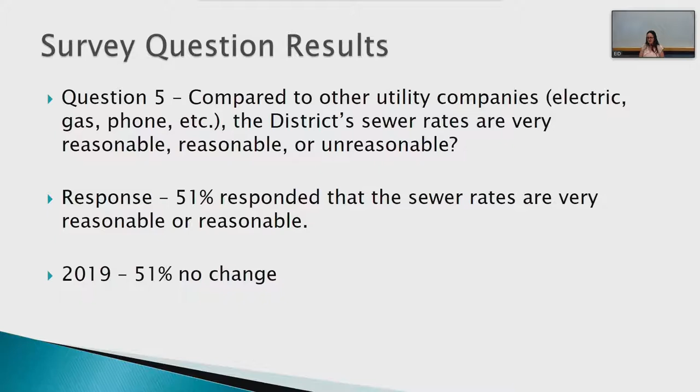Question for you. Yes, Lori.

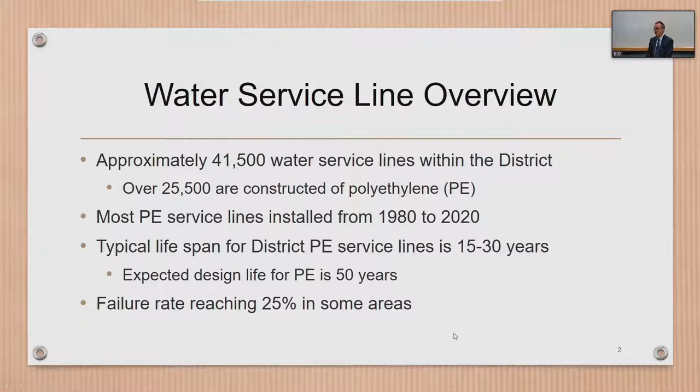And we're observing in some areas of the distribution system, service line failure up to 25%. Next slide, please.

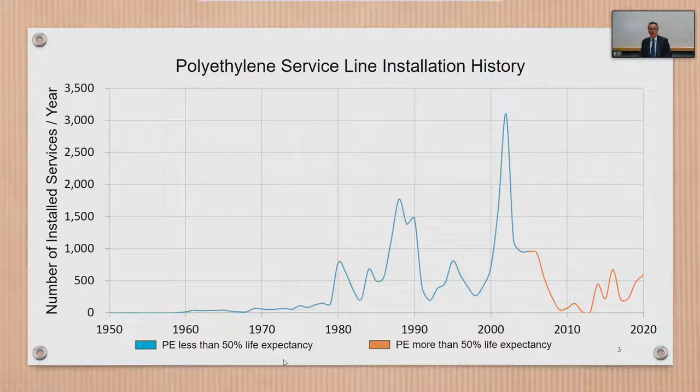This graph shows historical data regarding polyethylene line installation. You can see a couple of peaks during housing booms: early 80s, late 80s, late 90s, early 2000s. We have two different colors on this chart. The brownish line shows service lines that have more than 50% of their life expectancy used. The blue line represents service lines that are below 50% of life expectancy.

Next slide, please. In 2020, we recorded 651 leaks in our system. 505 were on service lines. That's almost 78% of total leaks.

As we know, and as presented by the GM, performance indicators show that EID has 42.41 leaks per 100 miles. That's almost worse than any agency that participated in the AWWA benchmarking. Increased service line failure pretty much requires us to move resources from regular preventive maintenance to service line repair and replacement.

That pretty much affects our maintenance program, hydrant maintenance that is essential, especially in our county with dry weather. They need to be ready all the time for use. Also, we have thousands and thousands of valves in the ground that need to be touched and exercised, and all of that is somewhat deferred because we're allocating staff for service lines elsewhere.

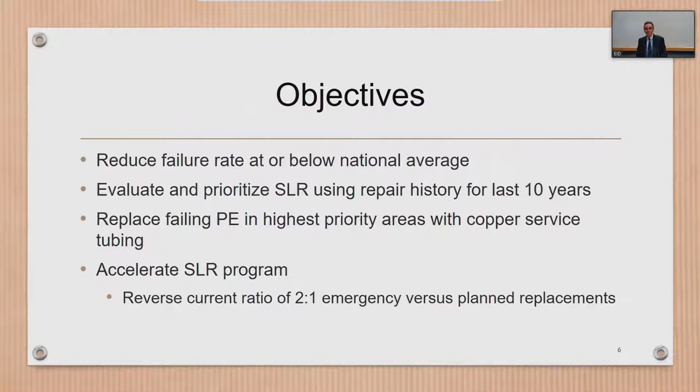Another objective: in analysis, we considered 3 different approaches to attack the same issue and improve the service lines replacement program. First approach was to maintain the current 3-person crew. Second approach is contract planned replacement with a third party. Third approach is additional staff to create a 5-person crew within El Dorado Irrigation District.

At the time, all three approaches were analyzed over a 10-year span. 10 years was chosen because the contracting approach is supposed to end in 10 years. Also, what we actually analyzed here were the basic three project management parameters: time, money, and quality. We assumed that all three approaches would keep the same quality, and we had to compromise on time and money.

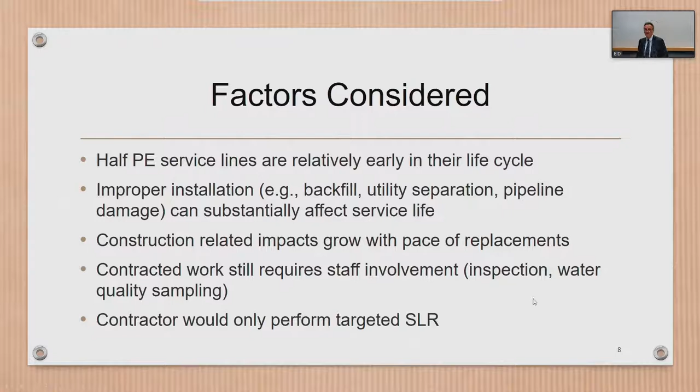Another factor that needs to be considered in this evaluation, even if we go for contracted third-party, EID crews will continue to perform emergency service lines repair and replacement. The contractor will pretty much do just targeted pre-planned service lines replacement.

Next slide, please. First approach, as I mentioned, is to maintain current crew.

Service lines replacement program was successfully implemented in 2020. Initially we had some challenges to bring 3 additional staff on board. That took a couple of months, and after that we were hit with COVID. But despite that, I think it was a successful year. We were able to replace 505 service lines: 350 was emergency response and replacement, and 155 was pre-planned.

During 2020, it was noticed and visible that a 3-man crew is not sufficient, because they're supposed to do multiple activities, and interruption of workflow was frequent, even downtime hauling spoils from site, bringing sander or cutback, and that inefficiency affected the number of service lines replaced per day.

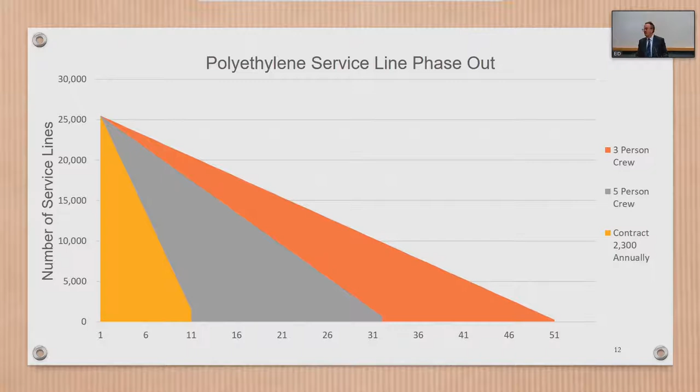This chart shows all 3 approaches. On the right side, the 3-person crew will phase out polyethylene lines in 51 years. The gray area is the 5-person crew, where polyethylene lines will be phased out in 31 and a half years. And yellow shows phasing out in 10 years with a pace of 2,300 contracted pre-planned services replaced. Next slide, please.

The recommended approach is to add 2 additional field staff, remain within the existing budget with inflationary adjustment, increase service line replacement from 500 to 800 lines per year, and complete phasing out polyethylene lines in 32 years, matching the full life expectancy of that type of line.

Overall cost of the project is compared on the same dollar value. Savings are around $5 million with this approach. This will increase efficiency in line replacement.

Danko, could you repeat that? Because I was wondering, did you look at present value, future value of money, and all that sort of stuff?

Base benchmark was a 10-year contract. And all 3 options are done on a dollar value as of the end day of the contracted option. That means we're comparing apples to apples.

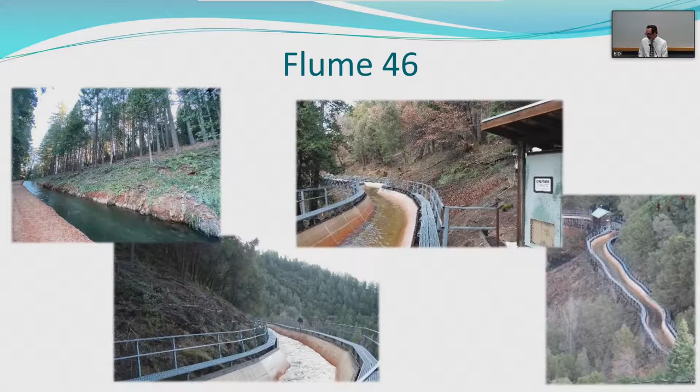Watch what you're doing here. Focus, it's way over here. Got it. Here we go.

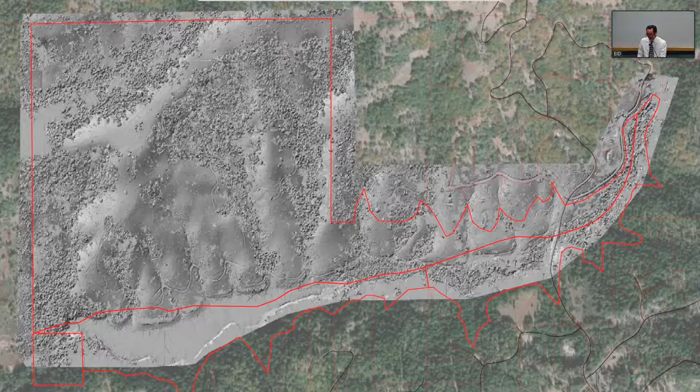This is the same drone imagery, just processed to really highlight the areas that were masticated to give it a smoother texture. You can see the ridge lines moving from south to north there. Those are the areas that were masticated along with the ridge line there. It's a stark difference, and if you have the ability to go out there and take a walk, you'll see a lot of work's been done out there. All right, next slide, please.

Mastication treatments started at the Weber Reservoir property in 2019, and there has been significant resprouting since then. The revised project will apply herbicide treatments to approximately 250 acres that were previously masticated, and the follow-up herbicide treatments were recommended and approved by CAL FIRE and is a standard way to control regrowth. The initial herbicide treatments are scheduled in the fall of this year to follow up spot treatments in early of next year. Next slide, please.

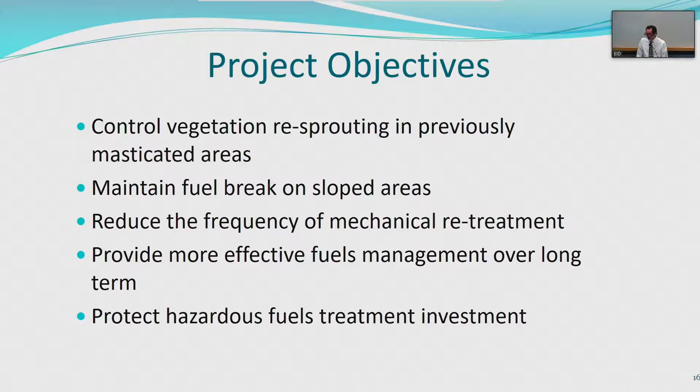The project objectives are to control vegetation resprouting in previously masticated areas, maintain a fuel break on those steep sloped areas, reduce the frequency of mechanical retreatment, and provide more fuels management over the long term and protect the district's investment. Next slide, please.

Now turning to the California Environmental Quality Act requirements. Staff revised the EID vegetation management project to include the use of herbicides at the Weber Reservoir property. An addendum to the ISMND was prepared and evaluated the use of herbicide treatments and determined that there were no new significant impacts and required no additional or change to the mitigation measures in the original MND. Next slide, please.

CEQA does not require an addendum to be circulated for public review, but in keeping with the board's guidance, staff provided notices to the adjacent property owners and the responsible agencies as we did with the initial ISMND. The addendum was open for public review and comment from June 24th to July 23rd, and we received no comments. Next slide, please.

To complete the CEQA process, the board shall consider the addendum to the ISMND prior to making a decision on the revised project. Staff will file a notice of determination upon approval of the revised project. Next slide, please.

Question: so would herbicide treatment be an ongoing annual thing? Is this a one-off, just to help clean it up one last time? Where are we at on that? This would be a one-time application with grant funds. The long-term management of the facility would probably fall back to our operations management and manager, and director.

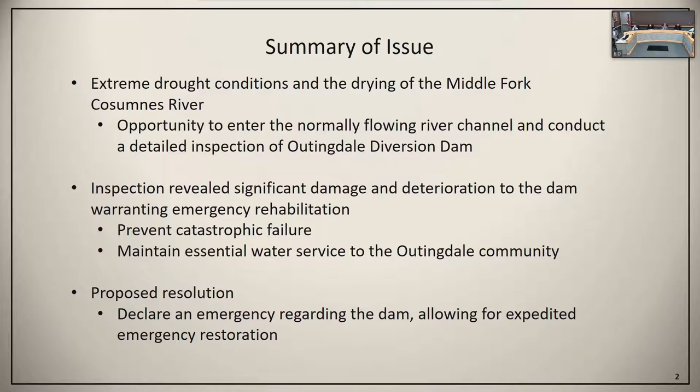Next, please. The main issues here are the extreme drought conditions and the drying of the Middle Fork Cosumnes River, which gave us the opportunity to enter the normally flowing river and conduct a detailed inspection. The inspection revealed significant damage and deterioration to the dam, warranting emergency rehabilitation, which, if put into effect, would prevent catastrophic failure and maintain the essential water supply to the Outingdale community. The proposed resolution would declare an emergency regarding the dam, allowing for expedited emergency restoration to be conducted during a time when water flows are lowest, providing the least effort to bypass inflows around the dam. Next, please.

To help us orient as we look at some close-up slides, we've assigned section numbers 1 through 7. Whether your point of reference is left looking upstream or downstream, in normal dam-related jargon we normally talk about it in reference to downstream. So if I say right, I'm talking about section 1, and left, I'm talking about section 7, okay? This dam, best we know, was constructed in the early 1920s, making it about 100 years old. We don't have any drawings on the dam. My understanding is this is something we agreed to acquire decades ago, so we don't have a lot of information as to what it's really made of, other than our firsthand observations. Next, please.

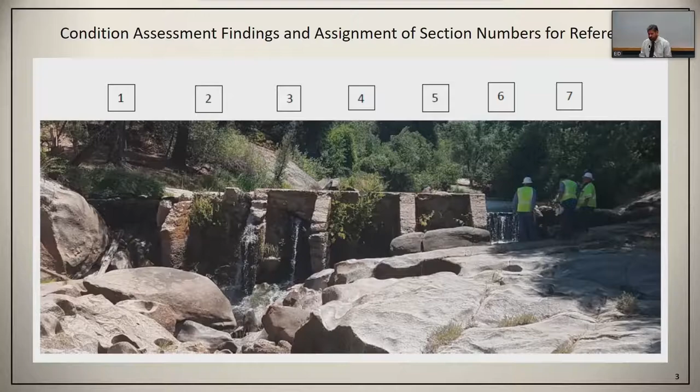This is section 1 near the right abutment. You can see hanging concrete next to the buttress wall - just to the left there, if you can point to that, Jennifer. Okay, thank you. That's what I'm talking about. That's just hanging by a piece of cable, and it's prone to fall. It's a hazard there. You can see the sandbags that were placed by crews in the last month to allow the ponding of water within the pumping area, but that's not a long-term solution either - that's something that would be addressed with the rehabilitation. You can also see some beginning undermining erosion of the base of the buttress wall here, and that's even more problematic on some of the other buttress walls. Next.

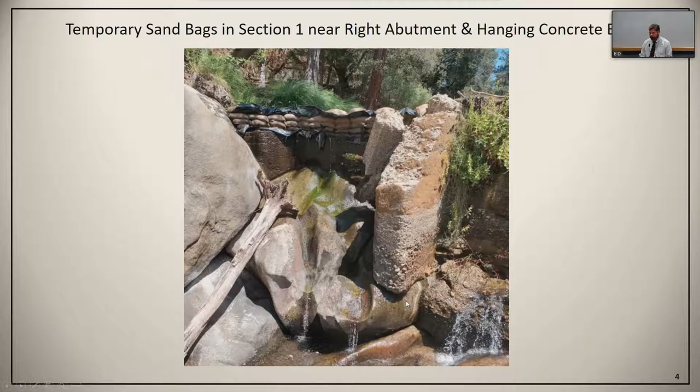This is the next section over, calling it section 2. Most of the dam crest is already broken off. You can see other pieces that are loose, ready to break off. You can see the opening where the arrow is pointing. Just below it, there's water actually passing all the way through from upstream to downstream - a through hole - and there are other places like that. You can see that crack joint to the right of it, also representing a through hole that may have been an old construction joint, basically through the pores of the concrete originally in that dam. Next, please.

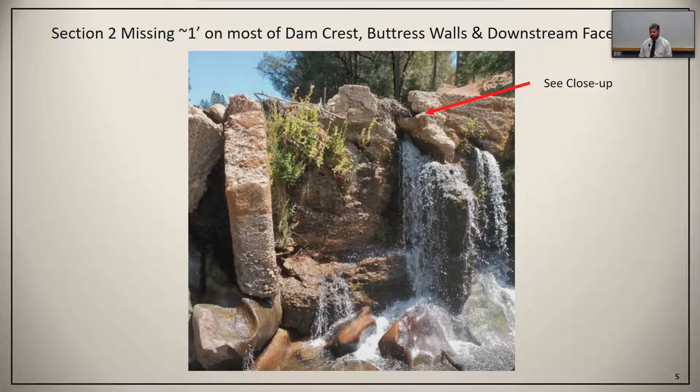This is a close-up. You can see the through hole a little bit better, and how this is fragmenting. You can also see where the red arrow is, the very minimal reinforcement - a steel pipe, 3/4 to 1 inch diameter, that seems to be the essence of the steel reinforcing we could see. There was also evidence of braided steel cable wound through this structure in places, but we don't really have any idea as to its spacing and consistency throughout the pour. Next, please.

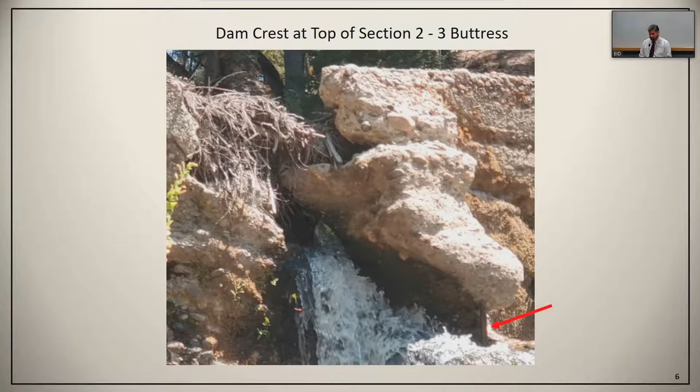This type of dam is often referred to as an Ambursen dam. It relies on the slab, or the main dam structure, being supported by buttress walls, and it was a variation to a gravity dam. If you're familiar with Folsom Dam or Chili Bar Dam, that's gravity—a very large mass of concrete, large footprint, and basically its weight holds it.

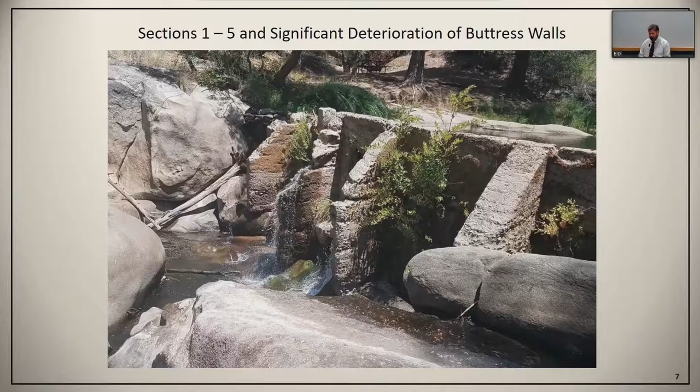You also have to deal with avoiding uplift pressures that can move the dam or cause it to become unstable. This doesn't have a drain system like that, but it's very reliant on those buttress walls—and that was the most troubling discovery in our inspection, looking at their condition.

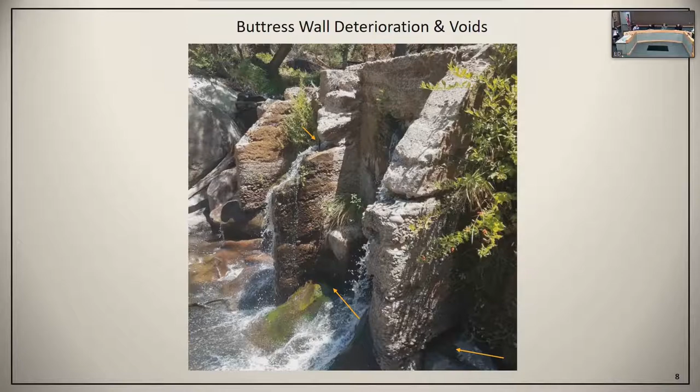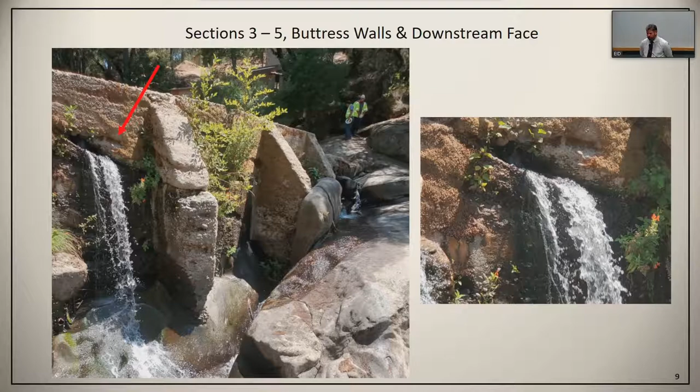Moving our way across, this is now looking at sections 3, 4, and 5 of the buttress walls. You can see still troubling deterioration going on until we get closer to the one being pinned by a rock near the spillway section. The two on that side are showing better conditions. The photo on the right is a close-up of that crack, which is basically a through hole, and of concern that it will continue to fragment and break up, or be more prone to do so over time.

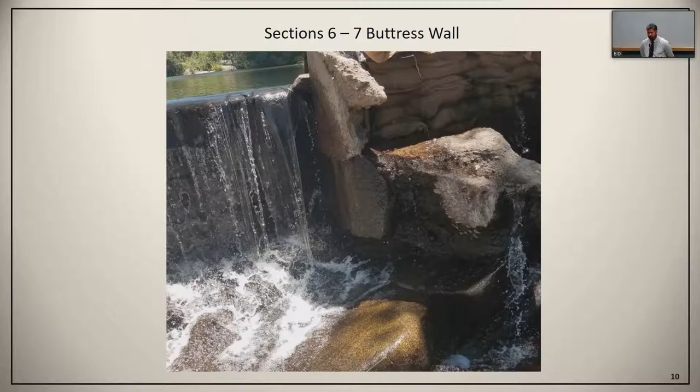We refer to the spillway or flashboard section as section 6, and the far left bank as section 7. You can see the buttress wall being damaged, and you can also see the sandbags, which we consider to be just temporary and will not be resilient to winter conditions.

Also a view of this left abutment. You can see a little bit of concrete on the far right edge on top of the rock—that's the remains of the old dam crest, and we believe it went all the way across to the dam crest on the far left, just beyond the flashboard structure. So the intent would be to restore that to its full height if we proceed with repairs.

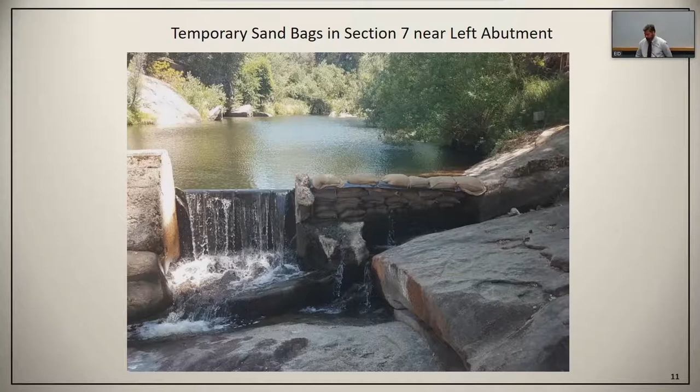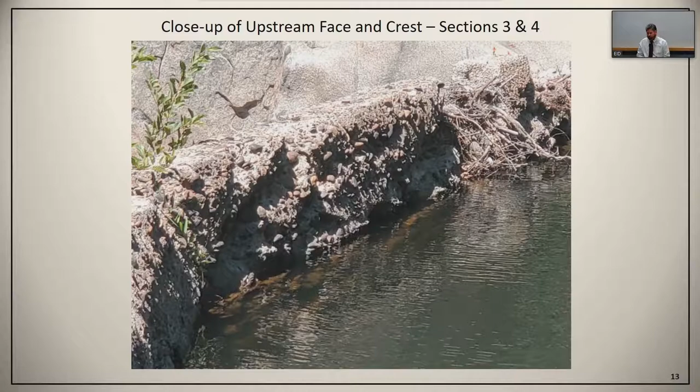So the approach that we propose to rehabilitate the dam—fortunately, there were some repairs made to the upstream face. This is a photo from 2014 showing patching that had gone on.

The extent of voids was not as significant in the area you see patched, but what sits above the top 4 feet or so is all the more significantly deteriorated, with very deep pockets.

Our idea here is not just to patch it, but this requires some steel reinforcing as well. We're proposing a concrete overlay about 6 inches thick, cast in place, formed and poured, with new rebar tying into the existing structure to give us impact resistance as well as service life through temperature control in the concrete. That would be tied into making the crest even all the way across.

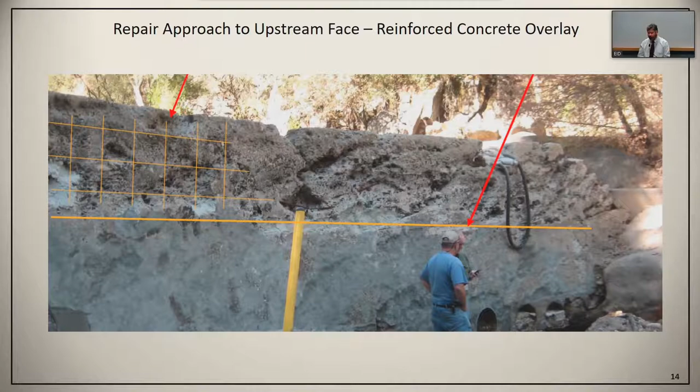Also, we're looking at reinforcing the top edge, since even concrete can be affected by battering rams of trees during a flood condition. So we're looking at adding a steel angle that would provide a more resilient and armored edge on both sides of the crest, both upstream and downstream.

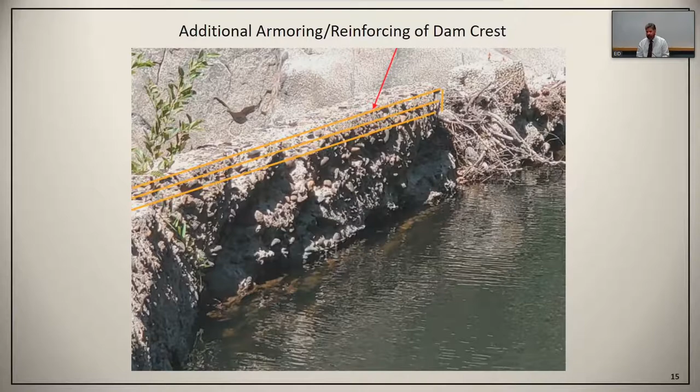For the buttress walls, we're looking at a similar approach, a reinforcing steel mat grid on both sides of the wall and on the downstream edge and along the top. These would be tied into the existing structure, doweled in, anchored with epoxy grout. We're also looking at adding deep dowels into the bedrock, which would basically make what we're adding stand alone in terms of adequacy to hold up the dam. So we wouldn't be relying so much on the old buttress walls, which are questionable just by viewing them, and we would have something that really brings the dam back up to a modern standard in terms of strength and stability.

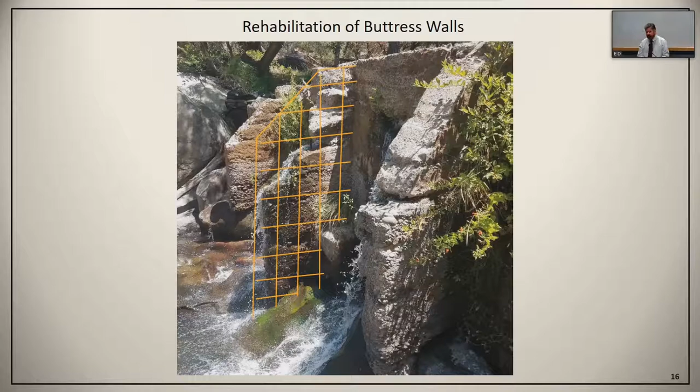Similarly, on the downstream face, we would build a similar grid, 6-inch thick concrete with steel reinforcing mat, doweled in along the downstream face to tie that structure in all the more, versus just the single dowels that, best we can see, are currently in place for each of the buttress walls. There also seems to be pipe dowels within the main dam structure at every 2 or 3 foot spacing helping it as well. But as you can see, the condition of the concrete is breaking apart and it needs help.

So the lines on the right would basically show that we would be maintaining the character of the dam, but the buttress walls would be a little bit wider as a necessity to accomplish the reinforcing. Next, please.

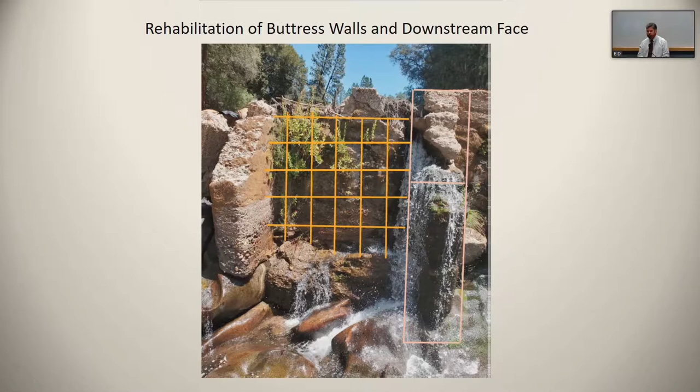So the funding requirements breakout is $50,000 for additional engineering services. This would include sketches prepared by our structural engineer, Tom Burkhardt at GHD, who we've already got underway to prepare for this should the board decide to move ahead and allow us to move this forward as quickly as possible. It would also provide us an as-built survey; and a drawing of the dam, so we have a good record of what we have out there, and we can carry that forward in our record and planning.

Materials, $50,000, capitalized labor, $290,000. This would be performed in-house by crews, primarily by the hydro division, with, at this point, help from borrowing one collections person. The water division is maxed out in terms of their current duties, so we're looking at being able to work this in before the fall outage that begins in October for the hydro division. And we include $50,000 in contingency for a total project cost of $440,000. The funding source would be 100% water rates.

Option 1 is to adopt a resolution declaring an emergency regarding the condition of Outingdale Diversion Dam, authorizing funding of $50,000 for engineering services, $50,000 for materials, $290,000 for capitalized labor, and $50,000 in contingency, for a total funding request of $440,000 for the emergency rehabilitation of the Outingdale Diversion Dam, project number 21045. Option 2, take other action as directed by the board. Option 3, take no action. Our recommendation is option 1.